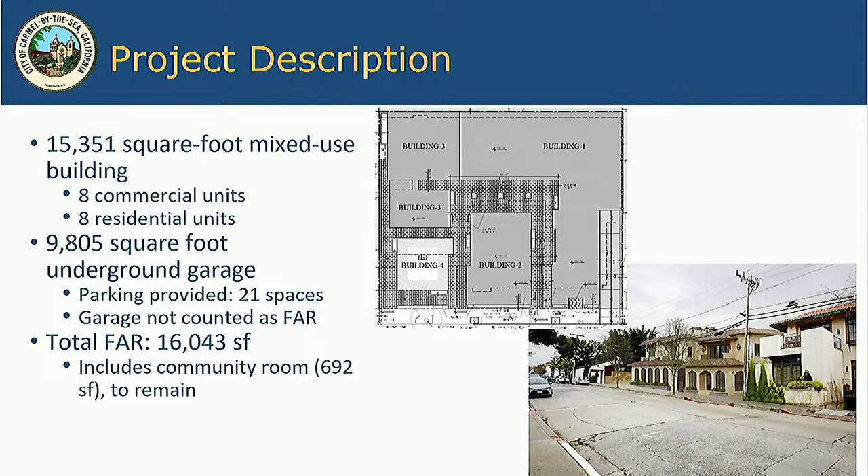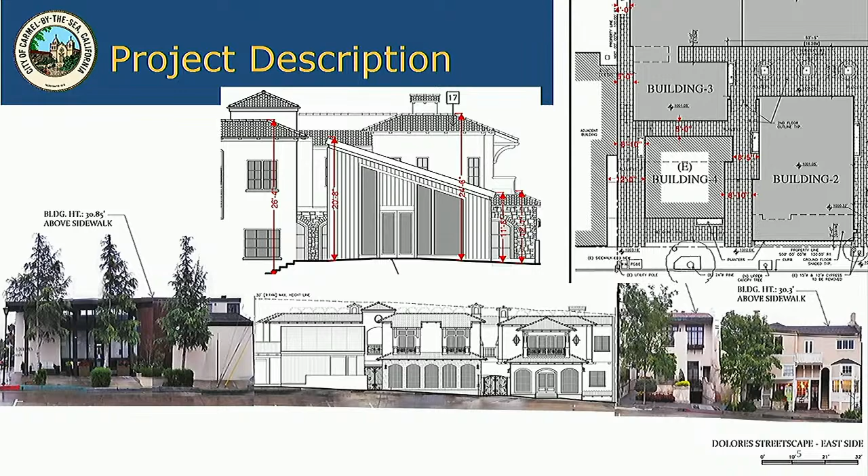The building is proposed to be within generally the same height as the existing surrounding buildings and will be set back between 5 feet and 8'10" from the adjacent historic resource.

The proposed project does not include any alterations to the bank building or community room structures, but it still does constitute a major alteration to a historic resource.

The municipal code requires that determinations of consistency for major alterations be prepared by a qualified professional, and if a proposed major alteration is found by the qualified professional to be consistent with the Secretary's standards, the project shall be presumed to be consistent for the purposes of making a preliminary determination regarding any required environmental documentation, and then staff shall forward the application and evaluation to the board for action.

As a reminder, a determination of consistency is a finding adopted by the city that the proposed new construction, in this case, complies with all of the provisions of the city's historic preservation chapter, as well as the Secretary's standards. So that is what you're considering today, the determination of consistency for the project.

The HRB is able to make one of 2 decisions today. If the board concurs with the evaluation, the board shall issue a determination of consistency and adopt any appropriate conditions of approval. Any finding for compliance shall be supported by substantial evidence.

If you do not agree with the conclusions of the evaluation, the board may request additional information prior to issuance of a determination of consistency, or may issue a finding of noncompliance. Any finding of noncompliance shall also be supported by substantial evidence.

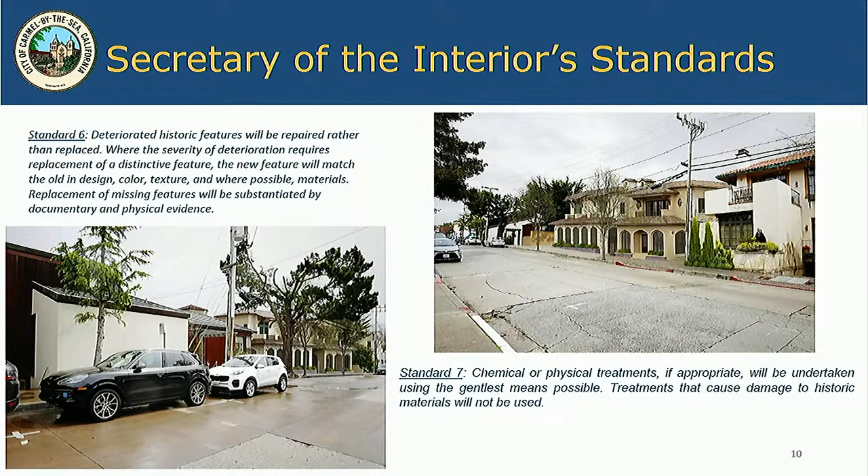For standards 6 and 7, these both address cleaning and repair and maintenance, and the project was found to be consistent with both of these standards.

In respect to the ornamented wall, a section of the concrete wall at the south end of the community room is proposed to be removed. However, the Phase 2 evaluation recommends the original section of the wall, identified in blue on the screen, be relocated as opposed to being demolished.

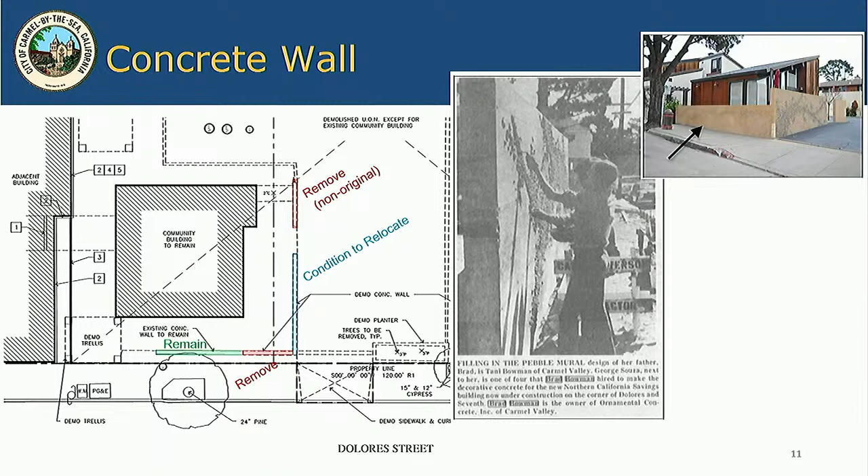The Phase 2 evaluation provides this as a recommendation, and it is not required for consistency with the Secretary's standards. Below are 2 examples of where the wall could potentially be located.

The original wall is right in this area where the laser pointer is now. One potential location is right here where the laser pointer is now, represented by this image. Another potential location is along this walkway, indicated by this image. These are just potential locations—the wall could really be located in any number of orientations. These were just some potential locations identified by staff.

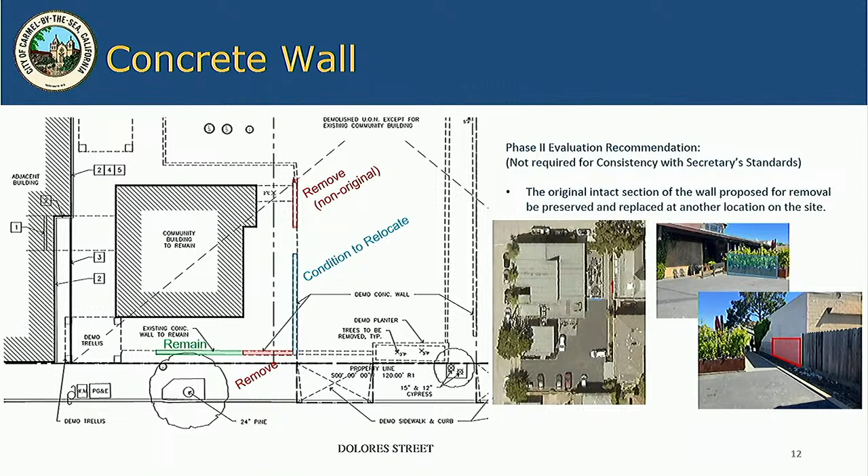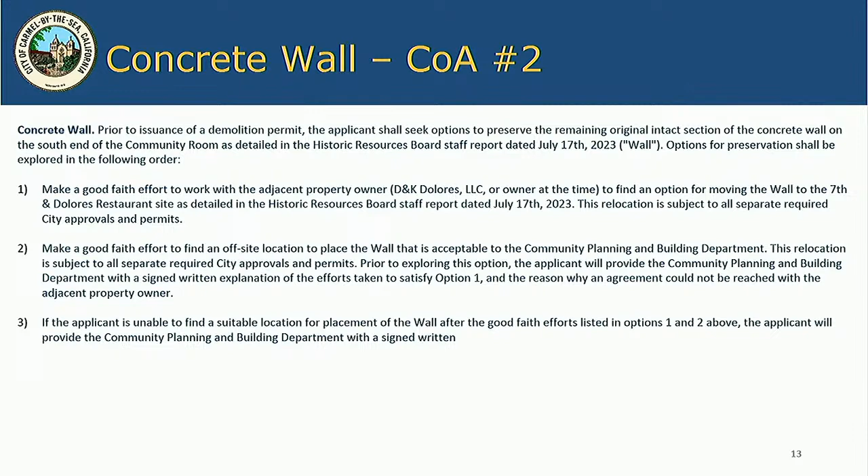So there is a condition of approval regarding the wall's relocation. Again, this is not a requirement, however it is a recommendation. I'm not going to read the entire condition, but basically what it says is that the applicant shall make a good faith effort to relocate the wall first on the 7th and Dolores proper site, the restaurant site, if you will. If that cannot be done, they shall make a good faith effort to relocate it elsewhere, preserving the wall in its entirety. And then if they can't find a suitable location, they shall let the planning department know why they were unsuccessful in their efforts for option 1 and 2.

So with that, staff recommends that the HRB adopt a resolution issuing a determination for consistency, and that concludes my presentation. I'm happy to answer any questions.

All right, comments, questions from us on the board? This includes underground parking, is that right? Yes, that's correct. Has there been any discussion with the owner of the restaurant about the wall? I would defer to the applicant regarding that question. Okay.

Any other comments or questions? All right, let's move to the public. Does anyone in the public have a comment? Oh, you want to present, certainly.

Good afternoon, historic board members, city staff. Can you hear me? Okay, thank you.

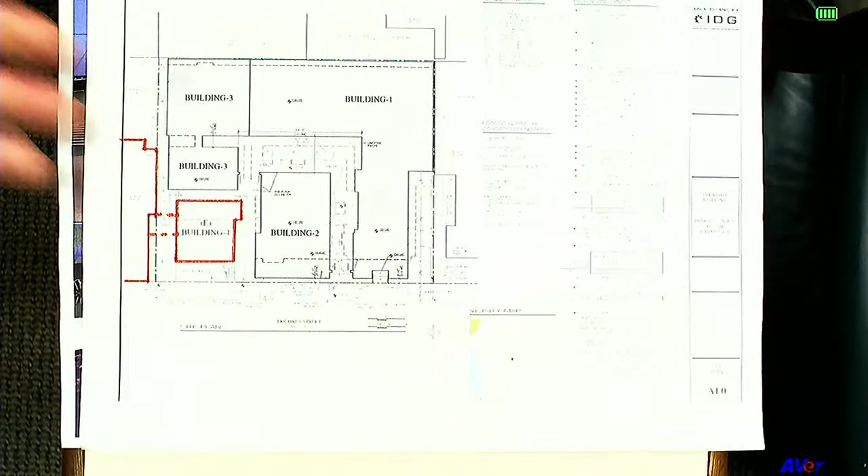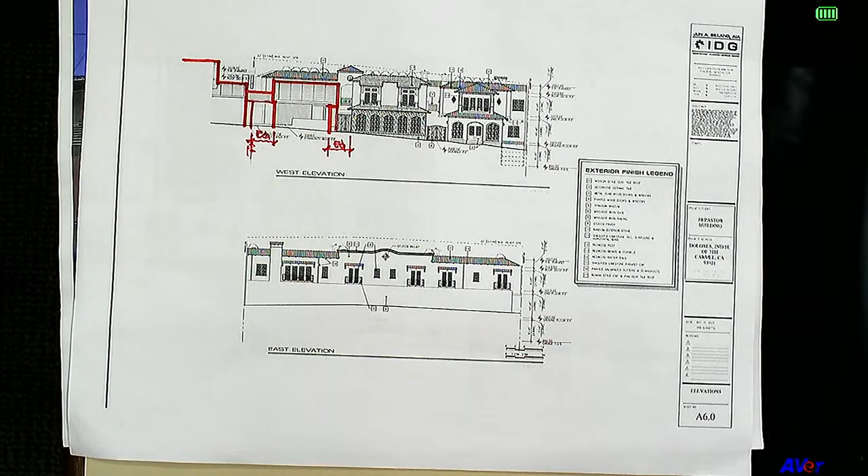The proposed JB Pastor building respects this spatial relationship, and with our current proposal we are proposing definable spaces around the community building. So everywhere you look, the community building stands alone by itself, and there's space in between. Also, we made sure as we designed it that the spacing on the north side equals the spacing on the south side between buildings. Furthermore, with our proposed project, the subterranean structure will be limited outside the existing community building above, so we're able to further preserve that area to make sure there's no damage that will happen.

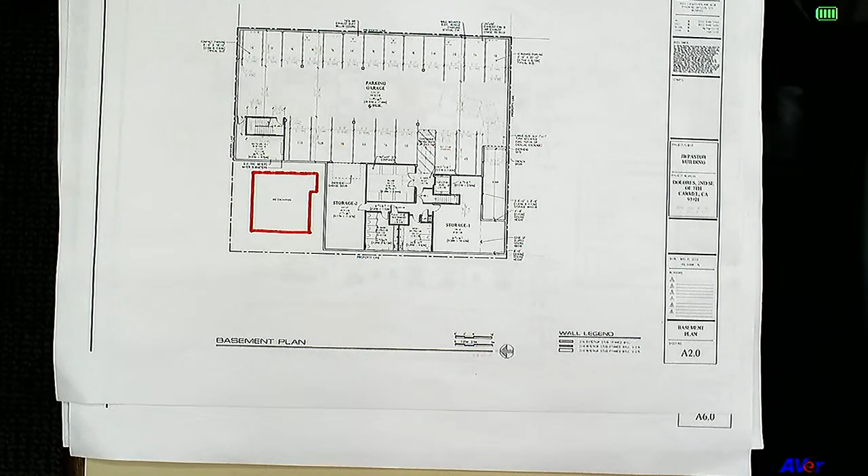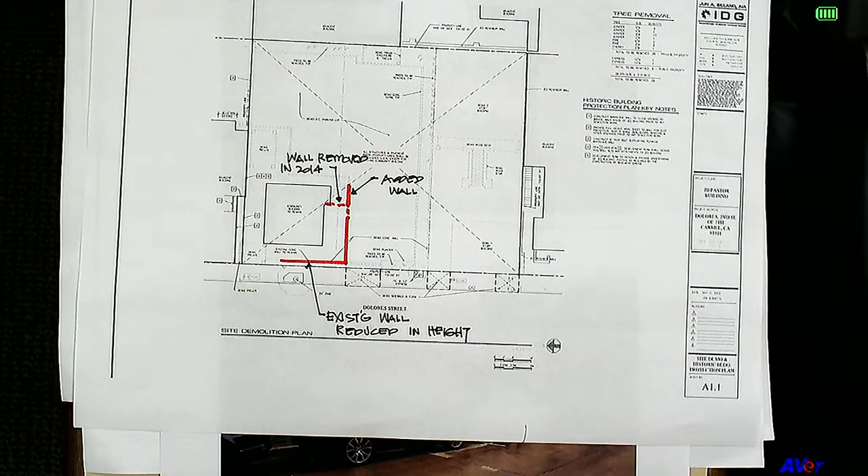There was a discussion with regards to the ornamental concrete wall. I think Evan has shown this picture earlier. I just want to reiterate that in 2014, the wall on the southeast has been removed and a concrete wall is added, and then the existing north or Dolores side wall has been reduced in height. So here's an image showing this being the historic wall, and this is the concrete wall. Here's where we were earlier, showing the wall on the Dolores side has been cut down.

Also, I want to point out, because in one of the letters from the community member, there was a mention of concrete paving that needs to be preserved. I think it's misleading, because this is what's there right now, and this concrete paving is not original to the structure. The image that was sent was of this concrete paving in front of the existing bank building, so it's not anywhere near the proposed community or the existing community building. This happens along Dolores and 7th as you turn around from the bank building.

So will there be any new paving then around the community room? Yes, because you're adding some steps, right? To add steps and a planter to address handicap issues as we get into it. And what material would the pavers be made of? Concrete. I thought it looked like brick. It's just delineation, it's graphics. It's not specific.

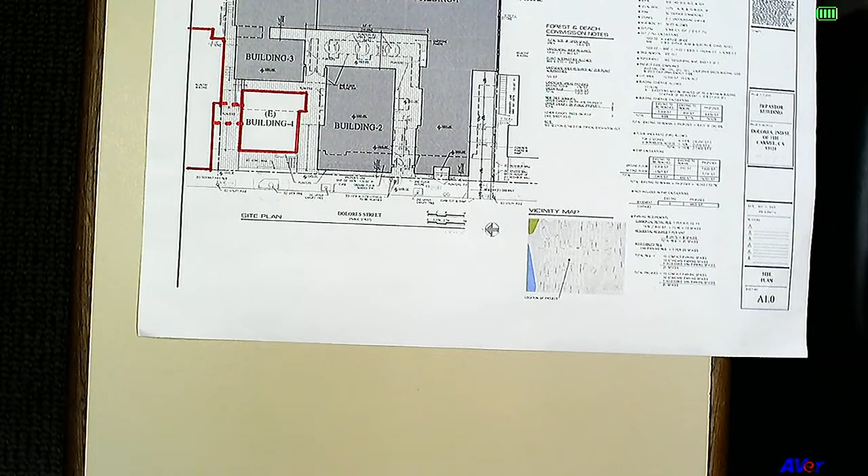So as you can see, building 2, as we call it, and building 4, which is the community building, there's a breezeway there. And then to the south of building 2, there's another access point. So either we use the breezeway between the community building and the bank, or the breezeway on the south side of building 2. Not both? You can choose both, either... or. All right, yeah, I think you need both. It's whoever wants to walk there, they have their option to walk around.

That's the idea of the concept, by the way. Typical Carmel, where you have small nooks and crannies that add interest to the village feel. And that's how we're designing this. I know it's not part of the discussion, but I just want to point out that's how we're designing this. We're not designing it as one block. It's a series of buildings. Thank you. Thank you.

Any other public comment before we close? All right, back to us, the board. Eric, what do you think? You want me to go first?

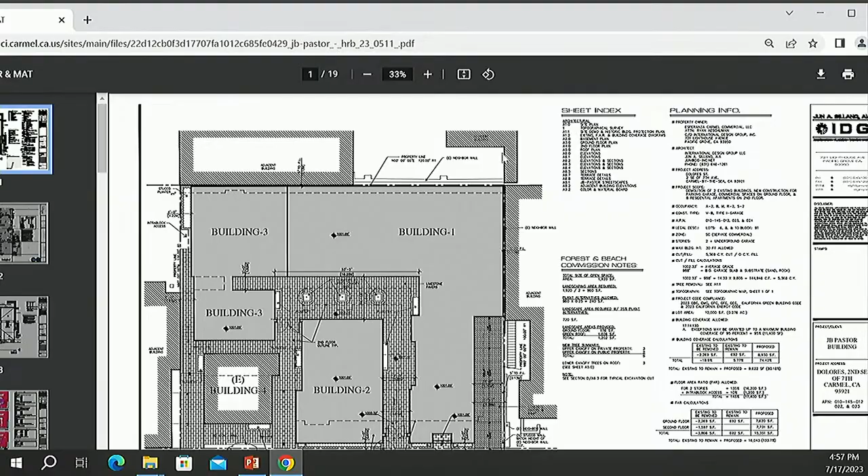Well, I think, first of all, I appreciate that the community room is now being preserved. And I do agree that the primary relationship for it in terms of its character-defining elements is to the main structure of the 7th and Dolores building, which is maintained. I think this brings up kind of a general issue, that people who have nice structures always want to keep that open space with nothing built next to them. It's always nice to live next to a park, but sometimes people have development rights that are adjacent to it.

So my feeling is that the fact that there is space now preserved on all sides of the building is important. And the fact that a building, no matter what, is going to be built next to it on the south side will totally change the nature of how that courtyard is. If they had a building there before, the way the wall works with the right angle would not be designed that way. And I think it's important to have a relationship and a circulation between the existing and the new, which is provided in this plan.

So I actually think it does make sense to move the wall. Now, moving a concrete wall is not the easiest thing in the world, so I guess I was just thinking of the phrase, how do you move a concrete wall? Very carefully. But I think it can be done, and I think putting it on the adjacent property, which they now have permission to do, makes sense. I would recommend, certainly, having a designer do it properly with their new seating area, but I think it'd be nice to see both sides of the wall, so that the proposal showing it as abutting the seating area, you can see it from both sides.